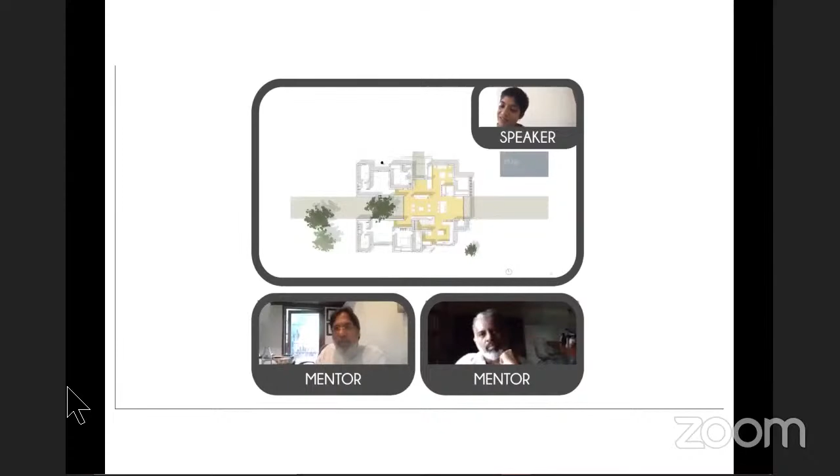Talented young designers and design studios working on design innovation with an approach relevant to our South Asian region have been invited to be part of the platform. We also encourage design students from the region to share their work, be involved in the dialogue, and be an active part of Design United.

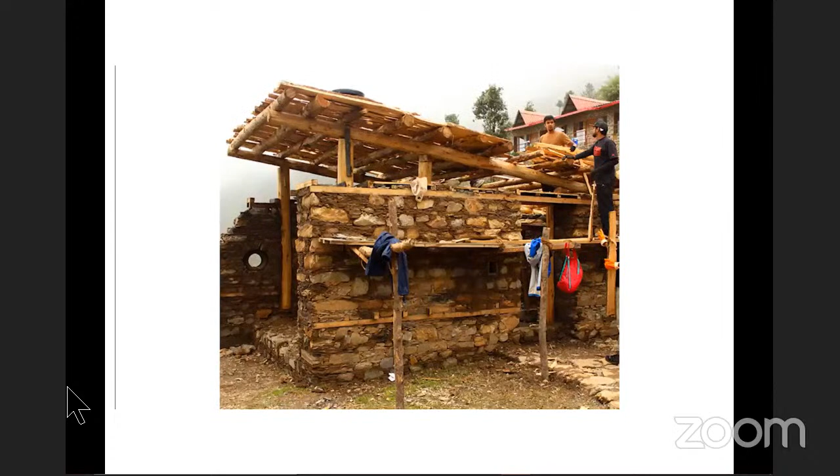Design United, most of all, believes in creating a community of designers and design knowledge that is largely contextual, with focus on contributing to the environment and our community. Design United believes greatly in the spirit of collaboration and idea exchange.

Welcome to Design United's 38th Design Conversation, a conversation with two talented design firms from the subcontinent, Studio Brio, Mumbai and Rotterdam, and Studio Seher, based in Karachi, Pakistan.

I'm Varna Shashidhar, founder principal of a regional landscape practice, VSLA, based in Bengaluru. I'm supported by my wonderful Design United and VSLA team in this endeavor, along with Clayworks Spaces. Clayworks creates flexible co-work spaces that focus on productivity and sustainability. They also offer complete work from home solutions.

Design Conversation and Design United has featured talented emerging designers from our region - India, Nepal, Sri Lanka, Pakistan - selected for their innovative approaches and practices that bear a deep resonance with the place they are from. Design United also firmly believes in interdisciplinary conversations and learning, believing this will lead to a cross-pollination of ideas across various design disciplines and therefore richer collaborations.

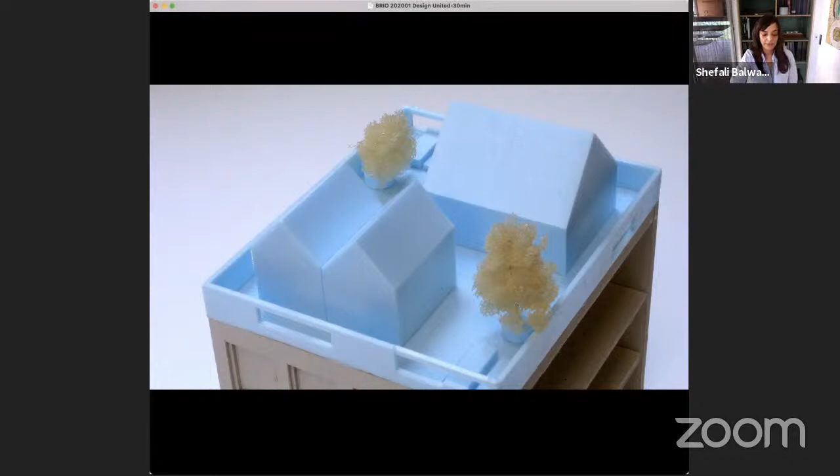However, that strong emphasis on concept also often led to a loss of the experiential and the physical quality of architecture, a loss to the process of making, and a building rather resembled what the blue foam model looked like, rather than emerging out of the logic of construction.

While looking for a place where architecture emphasized experience and materiality, an architecture that instead of calling out for attention would search for continuity, we decided to work in Sri Lanka in the studio of Channa Daswatte, to get a closer understanding of Geoffrey Bawa's works.

For those familiar with Bawa's works, they seem to not impose themselves on the surroundings, but do the opposite. This kind of tropical, wild Sri Lankan landscape almost determined his architecture and his conceptualization, dominating and overtaking it in reality.

This hotel that Bawa designed, the Kandalama Hotel, is sort of the highlight of architecture playing this disappearing act. Behind this blanket of green, creepers, and expansive rooftop lawns is actually a very straightforward and utilitarian scheme, very geometric, very man-made, very logical. Nature here is guided by the human hand, but over time has adapted, evolved, improvised, and surprised.

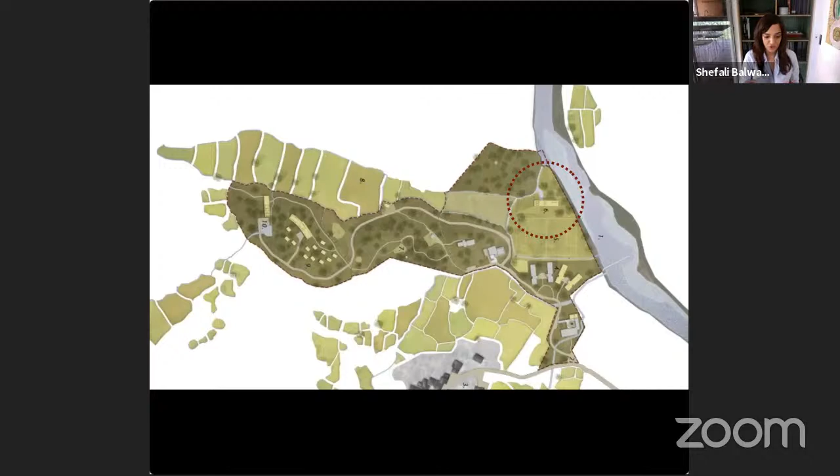So this is the building that we designed, that I'm going to show later, which is a learning pavilion, and it's a composite of two programs. It's partly a building, but it's also designed as a kind of challenge course. It's an interactive building and a play area.

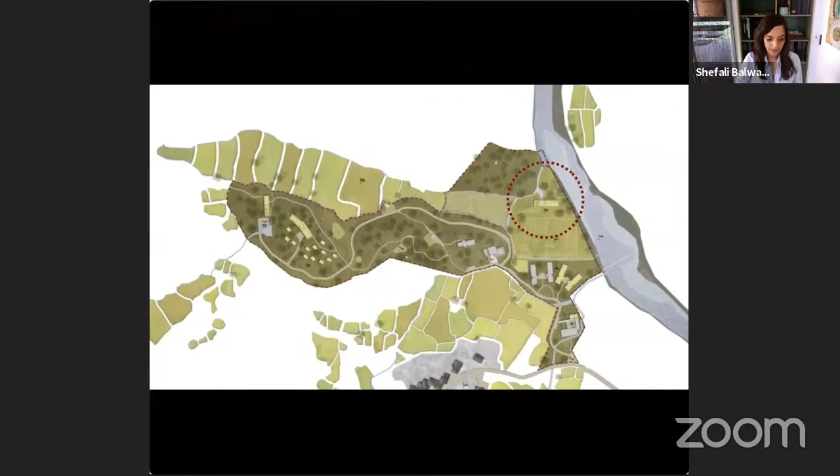And we intentionally located it here. Of course, we could have located it everywhere, but we located it at the confluence of four design elements. There was a confluence of a hill, a stream. So the hill is right here. There's a stream, there's a field in the foreground, and then there's a river.

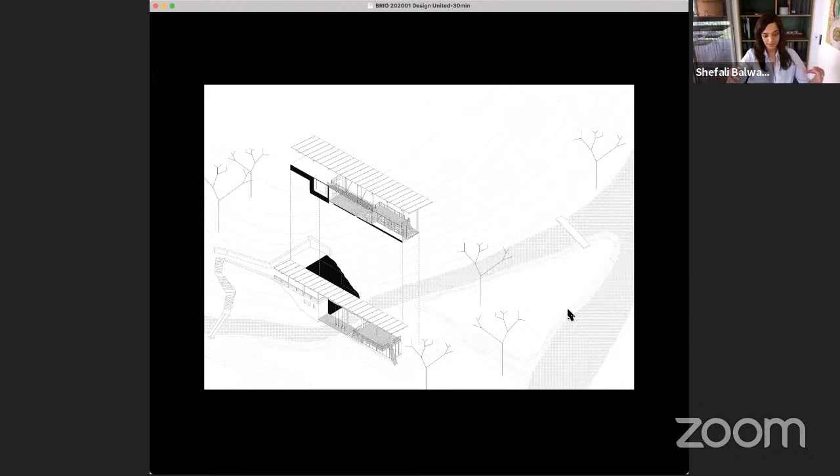So the elements of the building are placed with the stream flowing through, which is what you can see in the middle here. And the building sort of sits over the stream. And here you see how the roof straddles across, and it ties these different landscape elements together.

So this building is a building with the purpose of, in abstract terms, educating children about overcoming challenges in life and overcoming boundaries. And it is an extension of the already existing challenge courses on the campus. Children learn to play and work in teams to achieve goals.

In the summer, there's a cool breeze from the river that cools the spaces, and of course the shade from the roof provides respite from the sun. And in the monsoon, you're protected from the rain, but also the stream that runs below the building really comes alive and gives a different experience of how you view the building.

Often children's play spaces are associated with bright colors, but here we really wanted to emphasize the experience of the natural environment. And so nature becomes the classroom, and the classroom is outdoors.

In the next few projects, I would like to emphasize our work and its relationship with landscape, and how we as architects have learned to try and coexist with the land that we cohabitate through innovative typologies.

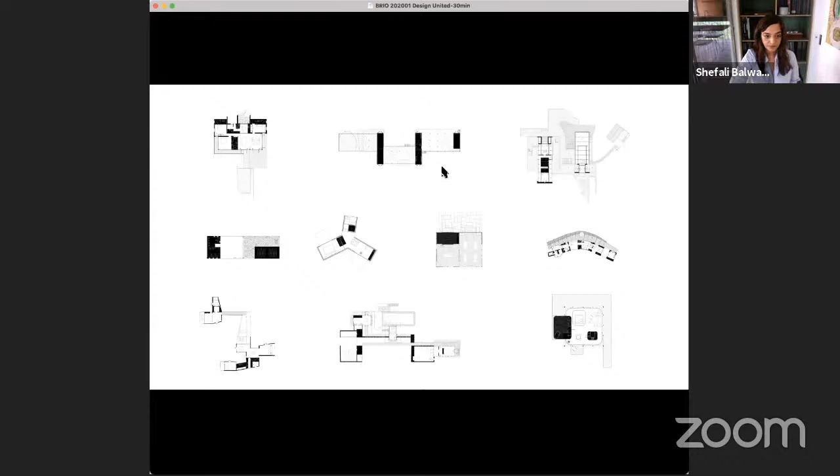So this first project we call the Riparian House, and it's on the Western Ghats in Maharashtra, where you find this typical undulating landscape, a lot of rivers and streams that flow down and eventually feed into the Bombay Bay. And we asked ourselves whether we would be able to create different relationships between the new settlers and this rural landscape, and can we make the building such that it's barely visible.

The climate here is quite a contrast from the summer to the monsoon. So in the summer, it's really hot and dry, and in the monsoon, it suddenly turns lush green. So the contrast is quite dramatic.

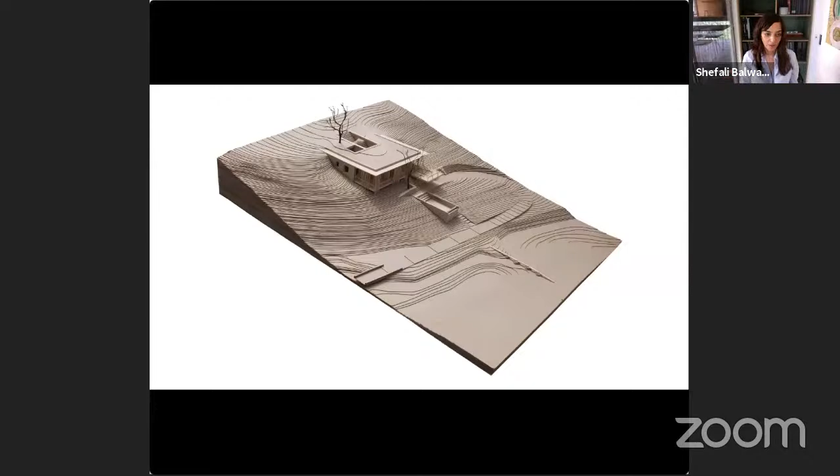And this is the building now, and of course, it looks all very natural, like it's always been like this. But building a house underground, of course, requires a lot of cutting and filling of land, and in a way impacting where you're building quite dramatically. And one can question whether doing this kind of excavation is appropriate, and an intervention like this is required.

But we felt that the long-term benefits of an underground house are high. The building is kept naturally cool, and it really reduces the need for external cooling energy, and creating that comfort within the house by doing this was what we felt was the right approach at the time.

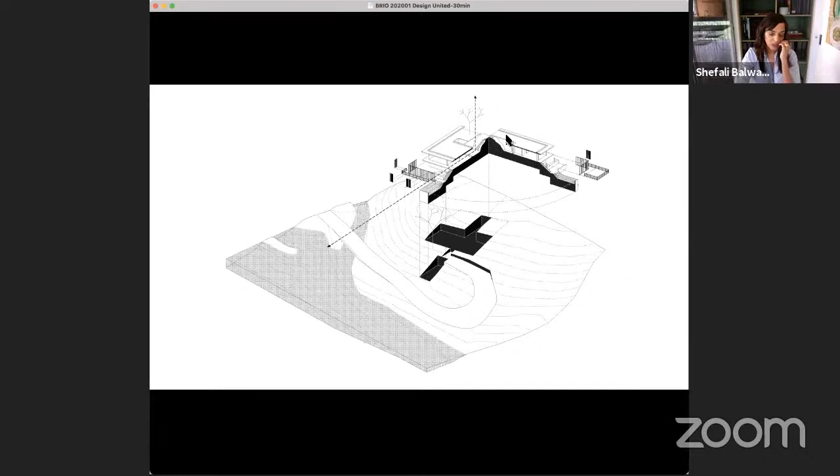So this is a section through the house, and it talks about how the roof, the green roof, and the terrain below are connected through this experiential movement within the house. You see in the plan that the house really sits against this hill, and there's a courtyard at the back that creates the access through the house, which then connects to the riparian landscape below.

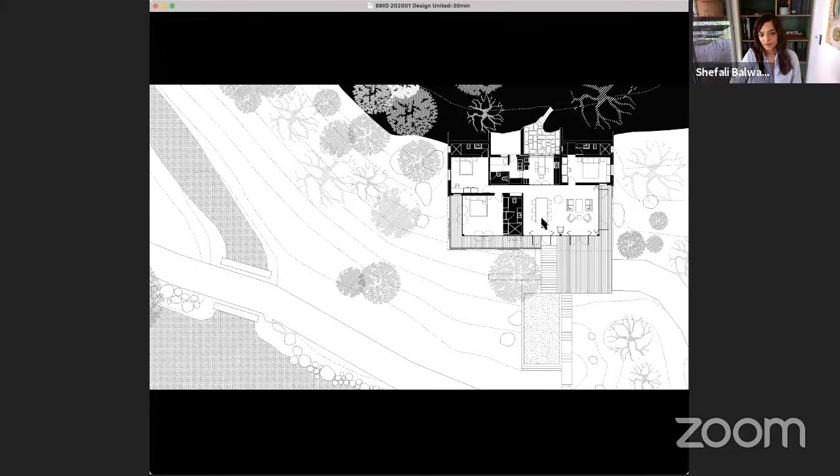And this is the natural landscape. Of course, you saw earlier how in the summer and monsoon there's a huge transformation. We planted drought-tolerant fountain grasses to mitigate the transition from summer to monsoon, because those grasses are usually visible year-round. The veranda that wraps around the house is an essential element of architecture in climates like this. Here we've created an additional bamboo screen, which animates the light that filters through.

It also creates a layer of privacy when needed in the house. The building is designed to age and weather along with the landscape, and there is something very sublime with this kind of collision or meeting of the two. There's a very synchronized, choreographed weathering process that takes place, within which you can find a lot of comfort and joy in that experience.

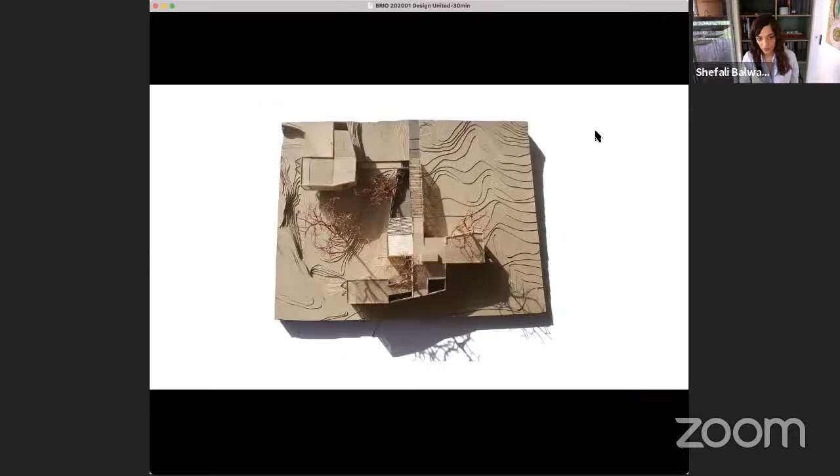This next house, House in a Stream, again questions this conventional typology. In this case, it is housed in a pastoral landscape. And here we built it as one house that's split into two, with a stream that runs through it, in between.

Here the bridge and the pergola connect the two units, so you're really drawn out of the house constantly to experience this outdoor environment and climate when you go from one unit to the other. There is a pool next to the entrance pergola that is a substitute for the stream. In the summer and in the monsoons, it becomes an extension to it.

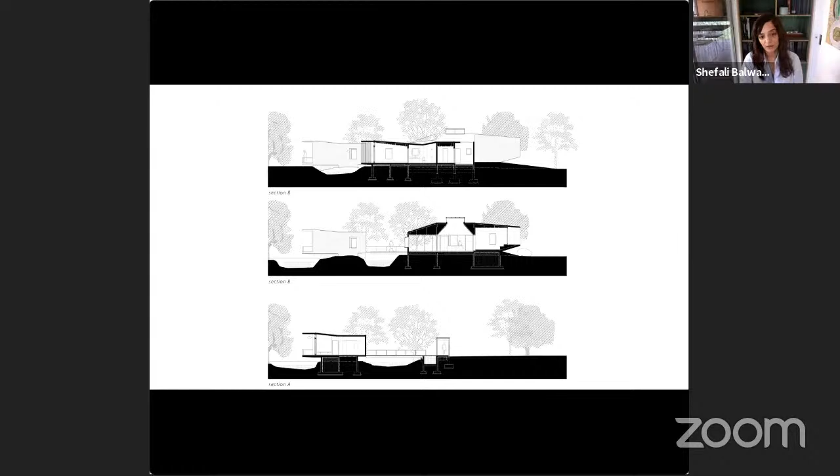So we took that opportunity by creating a false ceiling to create a different dynamic into the inside spaces. And in plan also, you see that there is a constant shift in axes and spaces, and the building is almost like this organism which stretches and pulls itself in different directions to hug the contours, or peek at a view, and become really part of the land that it's sitting in.

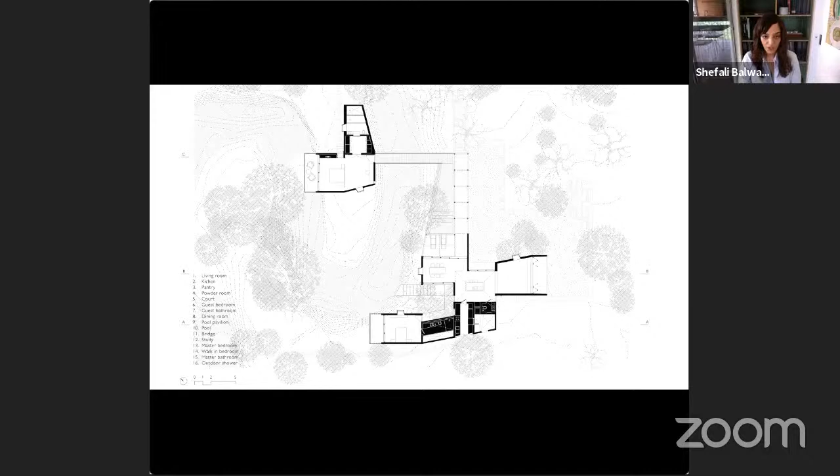The heaviness of this is in a way lightened by lifting these tips of the ends off the ground, and it's almost like a boulder in a landscape, delicately balancing on this reduced footprint. The homogeneous materialization emphasizes the sculptural quality.

In this project, we really highlighted the contradiction between the land and the building. The interesting part of the project is more in this denial or conflict, rather than in the hiding of the two. It's more about highlighting that contrast.

This tree villa we designed is located in, again, a 160-acre hilltop property. It sits almost 200 meters above that estuary below, and it's surrounded by dense forest. And when you enter, you have the mustard fields and a deck that wraps around the house that sort of leads you into the villa.

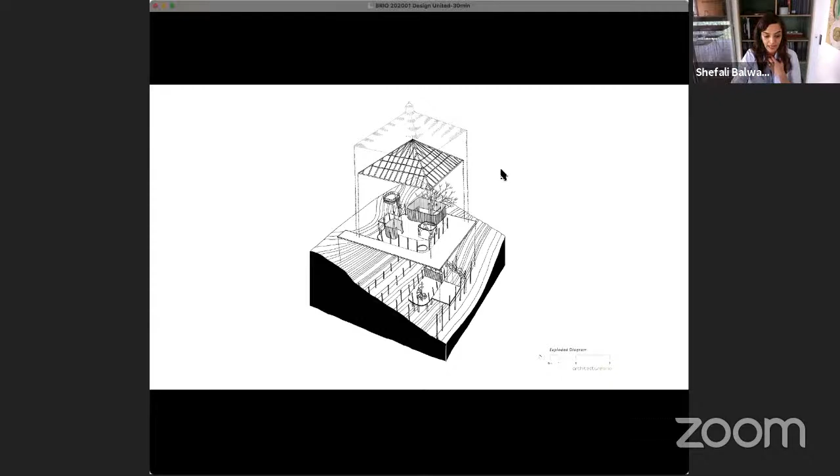So the villa was conceived as a celebration of the dramatic landscape by creating a series of blurred transitional spaces, each with different layers of transparency. And the restraint of the material palette highlights the surrounding greenery, and the crispness of the geometry and the slender proportions of the enclosure are intended to amplify all this nature that's surrounding it.

And the architectural elements that you see here, the slender columns, are carefully curated, and they are focused more on coexisting.

Here you see the bathroom enclosure on top, and it is crafted out of vertical timber panels and has mirror panel infill, which reflects the surrounding forest.

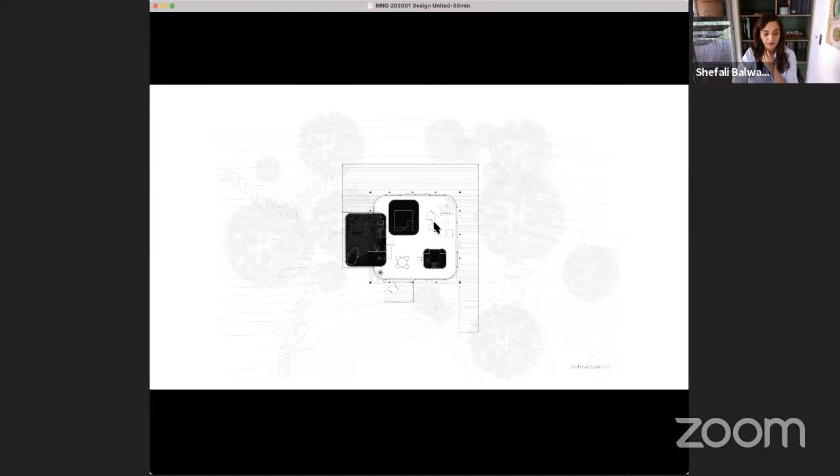So in plan, it is spread over two levels, and on the upper level you have three enclosures, and then interstitial spaces which are occupied by different programs. So here is a small pantry unit above which there is a loft bed. There is a partly indoor, partly outdoor bathroom, and then there is a bed.

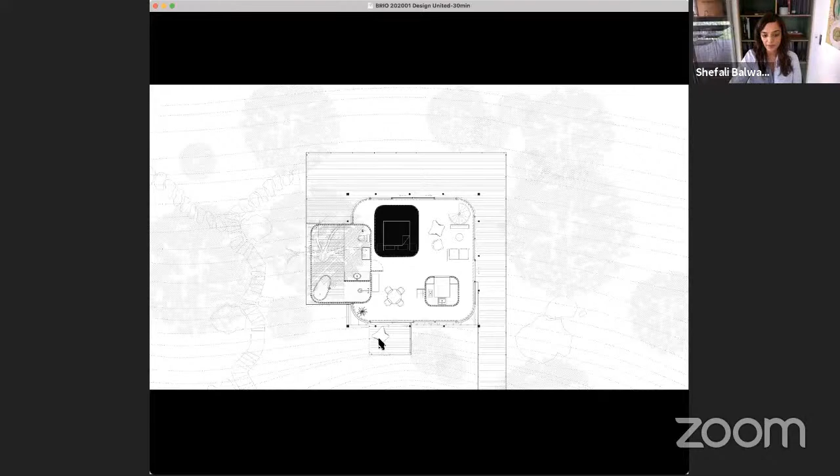The bed itself is within an enclosure. And the interstitial spaces are a lounge. This is a breakfast table and a small breakfast deck here. And of course, the free-flowing circulation creates this visual permeability across the plan.

The other branches of the tree spread out across the bathroom before they exit through multiple circular openings to the outside. We wanted to limit ourselves here by not using any wet construction. So the internal and external walls are made of timber posts, with an infill of acrylic or glass, and the floor is made of decking and, inside, terrazzo tiles.

The bed itself also does not have any walls. It's just like this soft linen or curtained enclosure. And a spiral staircase takes you to the level below, which almost feels like it's suspended from top.

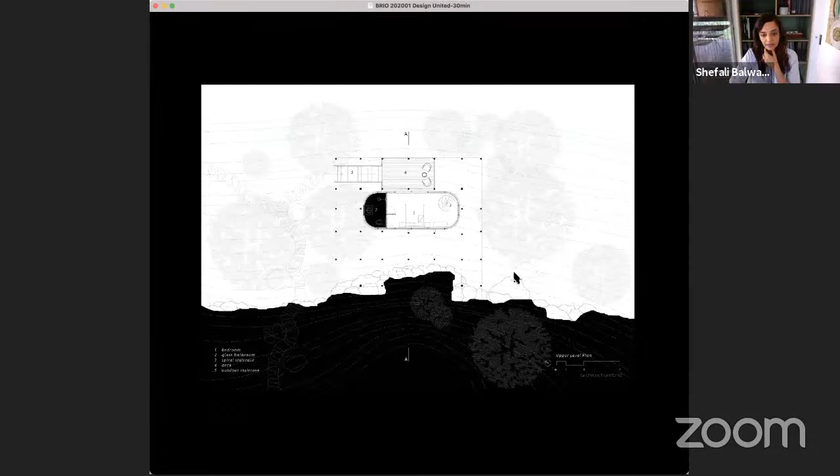So here we were really fascinated by the idea of the uninhibited way that you could experience the forest and the landscape in this setting, and in a way only have the forest, the eyes of the forest, really looking back at you. And this is also called the glass house. It's a beautiful experience, especially at this time of day when you start getting the reflections on the surfaces.

Just the last project, I want to focus upon materials. In our practice, we're really not focused on a singular preference of materials. We live in an age of scarcity and depletion of material resources, skilled labor, and craft, and of course the architecture industry is hugely responsible, and it also makes the situation worse by causing ecological degradation through the mass extraction of building materials.

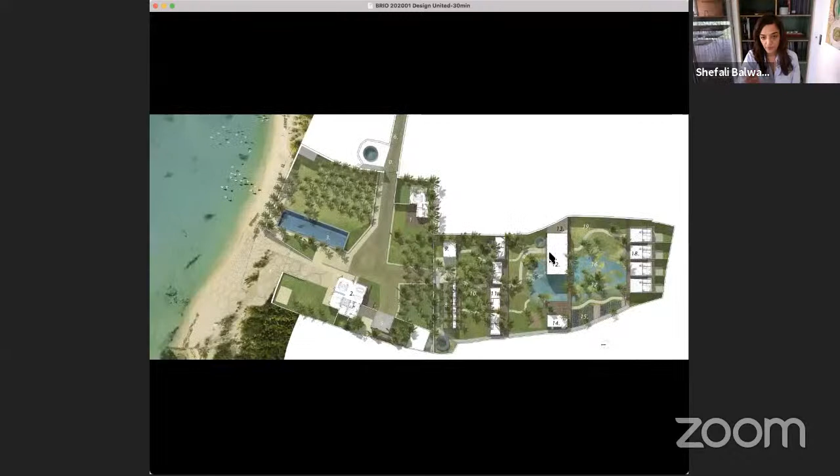And next to the pond here, number 12, we propose the workshop building. So the plan of the workshop is simple. There are two structures defined merely by a row of columns, two chopped-off pyramid-shaped roofs with two skylights that are shifted away from each other and define the two spaces experientially.

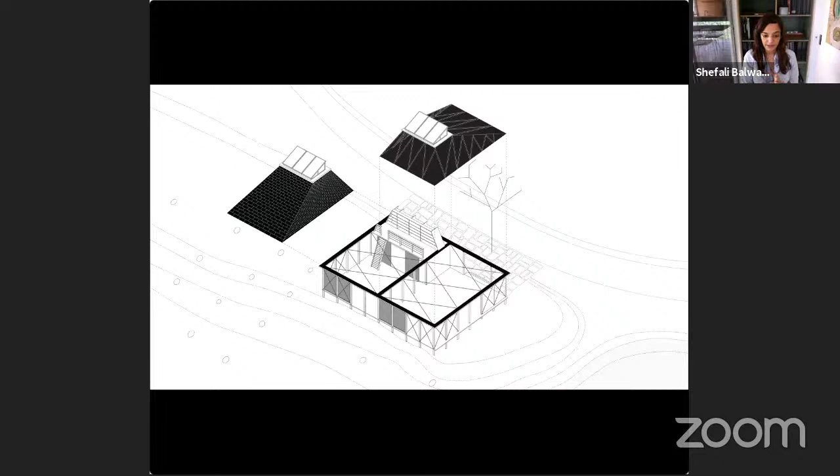The typology is loosely based on this Ambalama in Sri Lanka, which is such a beautiful structure, one of the most beautiful public infrastructure projects of the early 19th century. Here, space, functionality, tectonics, materialization, and structural essence all converge, and it's heavy, down to earth, but at the same time light and simple.

The spatial quality of the Ambalama is one of continuity while being anchored and rooted to its specific location. So the workshop building that we designed is a 12 by 9 meter tropical shed, with a grid of 1.5 meter columns and a 6 meter high roof.

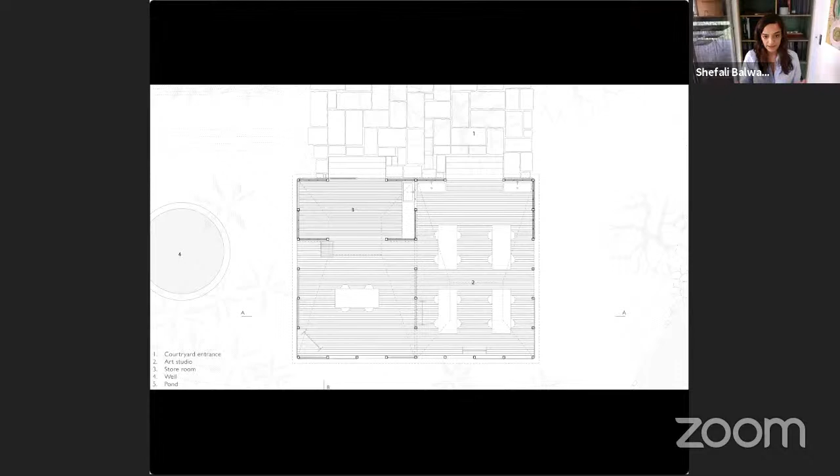There are stilted columns here, which we made with galvanized steel, and the roof structure is made of bamboo V-shaped rafters.

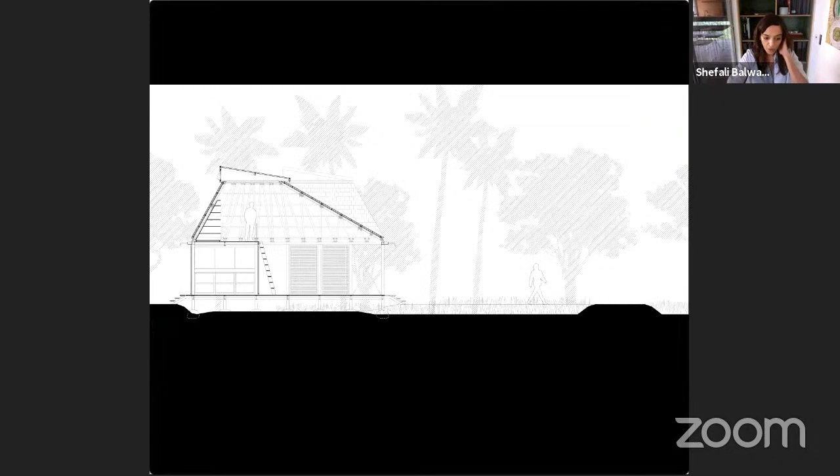There is a solar skylight on the top of the roof, which pulls up hot air from below and encourages a natural flow of ventilation. Here you see how the solar panels are integrated into the roof design instead of just being placed on it later.

And that's a view from above. Because regulations don't allow us to build permanent structures near the coast, this was assembled as a kit of parts. It was completely manufactured off-site and then assembled on-site.

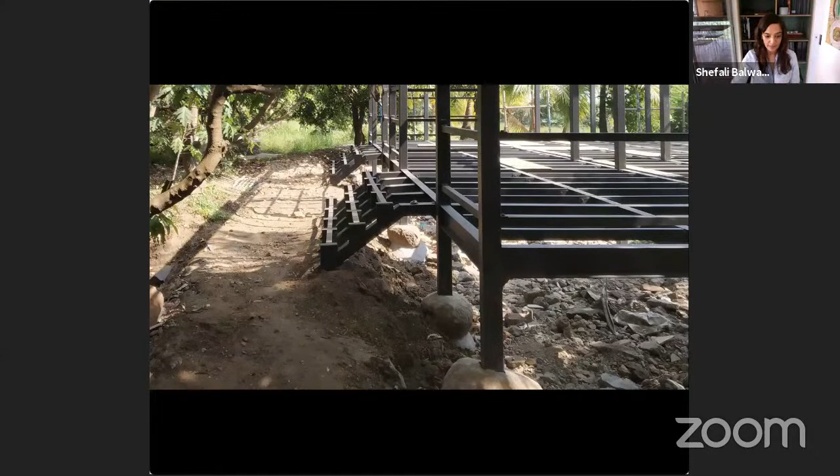And here you see the nut bolt connections that were used. The structure is placed on a foundation of boulders.

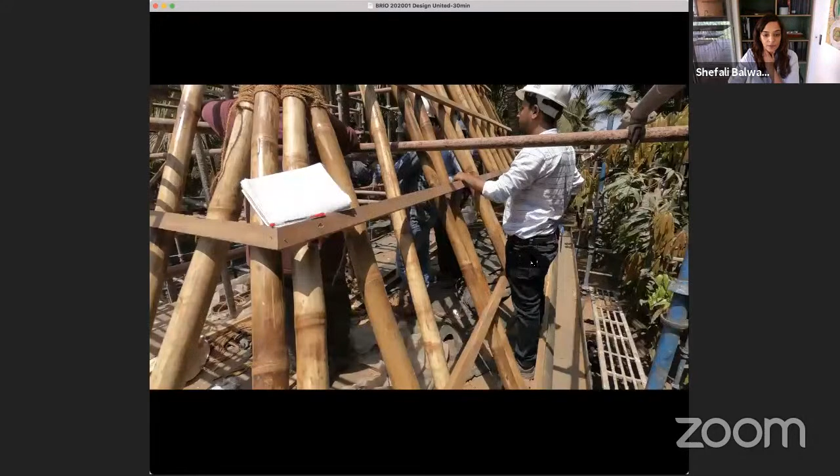Bamboo is a wonder material, but it can also be very frustrating to work with, because the local bamboo we find here is crooked. It also tapers in diameter from one end to the other. A lot of the bamboo projects we see from Southeast Asia and Bali look very beautiful and simple, but we did not have the luxury of sourcing expensive, straight bamboo.

So we worked with what we had, and we placed it in a V grid and a diagonal zigzag layout of the rafters.

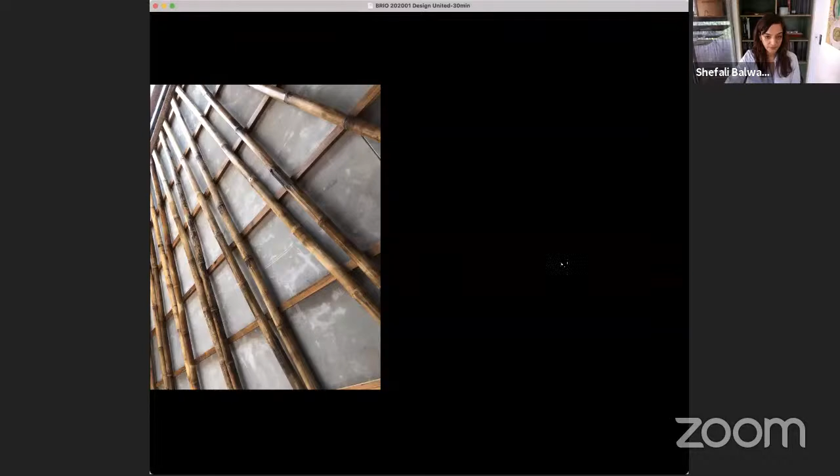And here you see how the light keeps changing within the space during the day and animates the space differently, and then in the evening and night.

So thank you. I'm going to leave with this quote by Aldo van Eyck, and I'm happy to take it up for discussions.